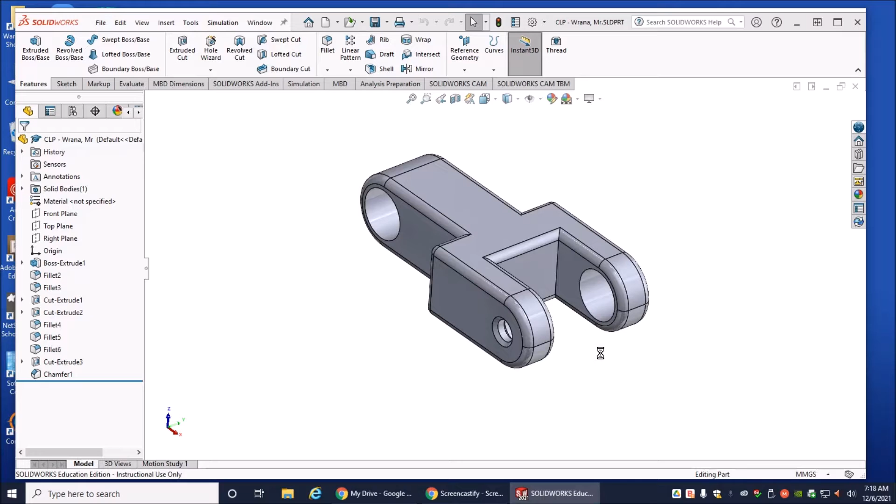First thing we need to do is make sure that we have our part open. I've noticed some people that were working have had issues with linking their drawing to their part because the part wasn't open, so the first thing you need to do is open the part. Next, we're going to open our drawing as associated, and it's doing its linking. And there is our drawing. At this point, you should have made any corrections from last week's assignment and gotten everything taken care of before you start this video. Okay, let's jump into the first part.

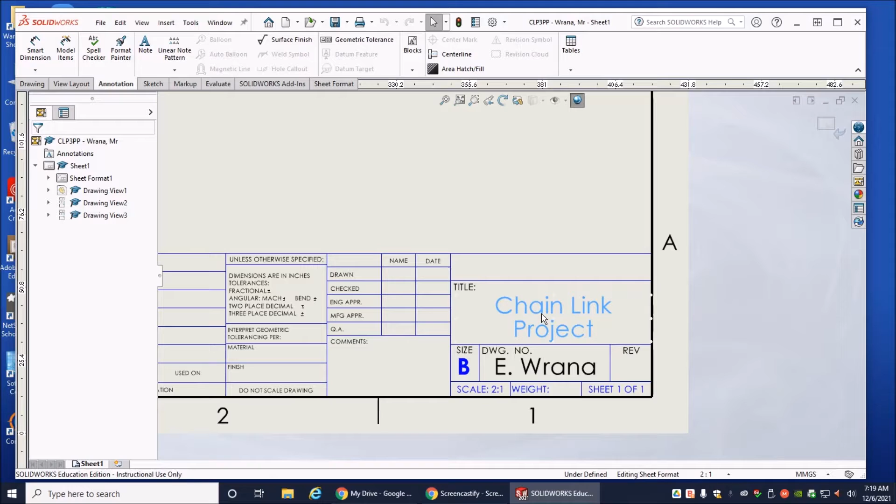Okay, sheet number 1 - down here you'll notice we have a tab that says sheet number 1. That happens to be our 3-point projection. We are going to make a change in this sheet, changing the name to 3-point projection. To do that, come up here to sheet 1, right click, edit sheet format, zoom in, double click into here, and change it to 3-point projection. Close the sheet, click out, and then close the sheet. And that is finished.

Okay, next part, we're going to add a new sheet, and what we're going to be doing in this sheet is what we're going to call an expanded view. So we're going to go down here in the lower left-hand corner where it says add sheet, and go ahead and add the sheet. Unfortunately, it does not carry anything over because there's no metadata, so we have to change this every single time. We're going to edit sheet - the box is there, you just have to click into it. We're going to call this expanded view. Click out, and obviously we're going to change this. What we found out is first and last name doesn't really work, so use first initial, last name - make sure it's capitalized first initial, period, space, capital last name. Once we do that, we're going to close the sheet.

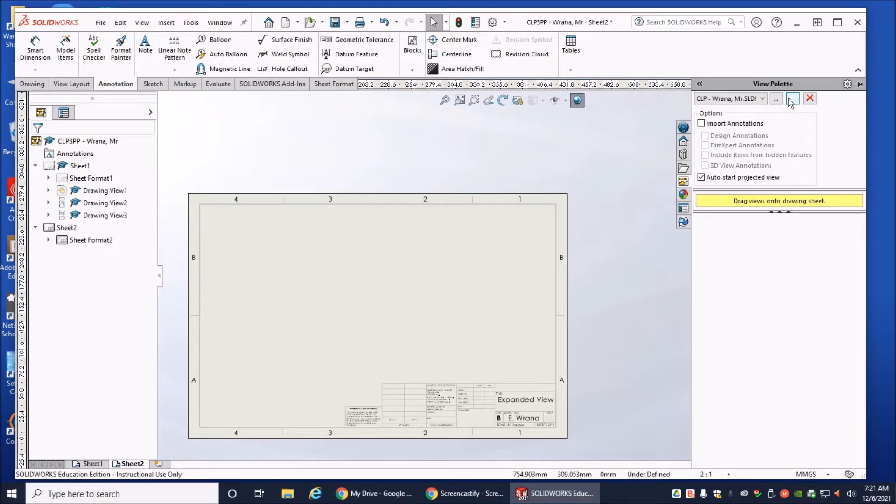We'll zoom out just a little bit. Now, expanded view, I'm going to open up and refresh, and there is my views. Now everything we're going to need is going to be in this orientation, so if everything on yours is vertical, you're going to start off with this view. Don't look at the front part, look for this view here. It's a little different from 3-point projection - this is going to be our standard view. So there's something in this orientation - again, if it's vertical, you have to rotate it when you drop it.

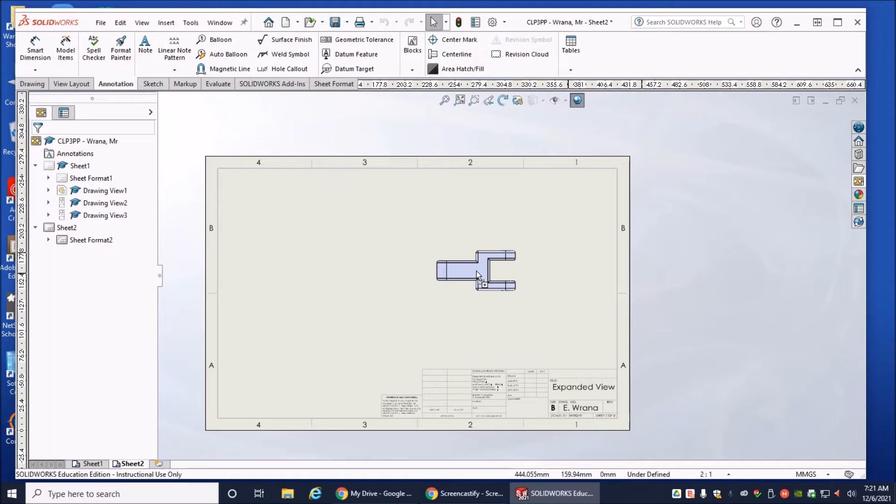So what I'm going to do is put this right in this column here, kind of in the middle - just drag about in the middle, eyeballing it. The two edges on the right-hand side for the groove is kind of in line with the line between 1 and 2, and drop it. If you need to rotate this thing to get it flat, use the rotate button up here before you do anything else. Yes, it's trying to drag a view up here, but hit the rotate button - a little window will appear, and rotate it 90 degrees, close the little window and then continue.

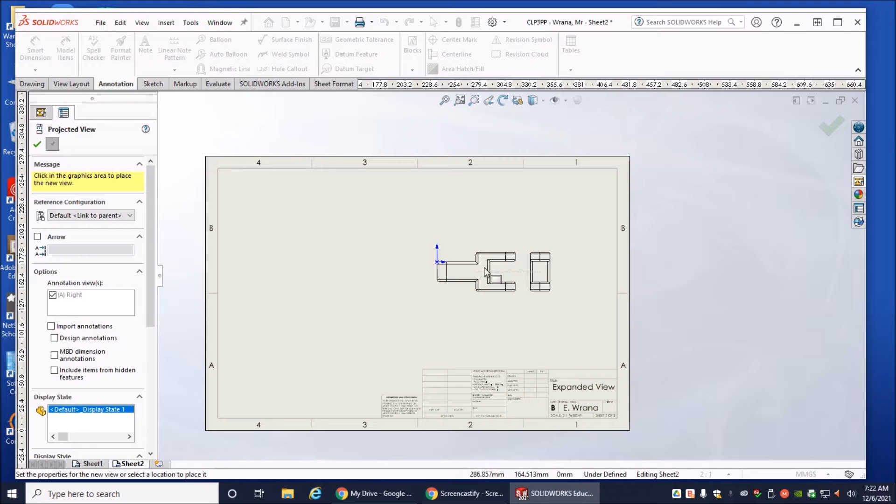Expanded view, I want to put one. Now, as you can see, this thing is trying to project all the different images everywhere - well, this is what we need. So I'm going to drop the top one up here, drop the bottom one down here, this side over here. This is kind of like taking a box, cutting it and opening it and laying it flat so you can see all the different sides of a box in one view. So it's kind of going to have a sideways T formation.

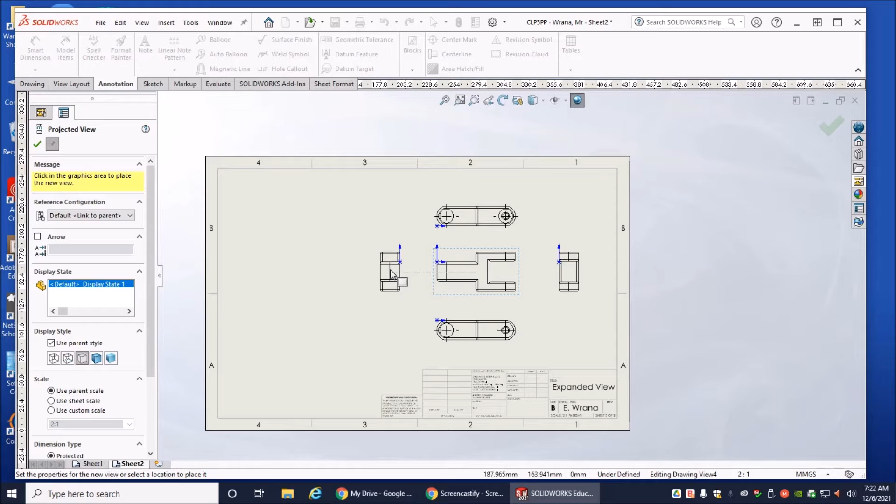Now the one over here is going to be different - this one is not what we need, we need the reflection of this. So I'm going to close out my projected view, come back over here - I need the opposite. Drag and drop, it is in line, drop it. And that is the expanded view. Close that - that is all there is to it.

Now, if we don't want the origins to show up, we can go to View, Hide Show, and go ahead and get rid of the origins. And that is it for expanded view.

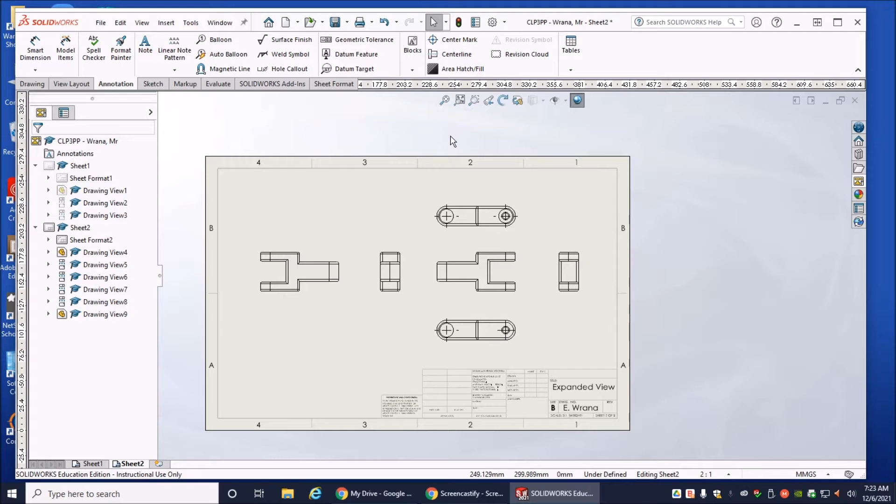All right, now the next drawing we are going to do is called a section drawing. We're going to take one of these views and put a slice line right through here to see what's on the inside.

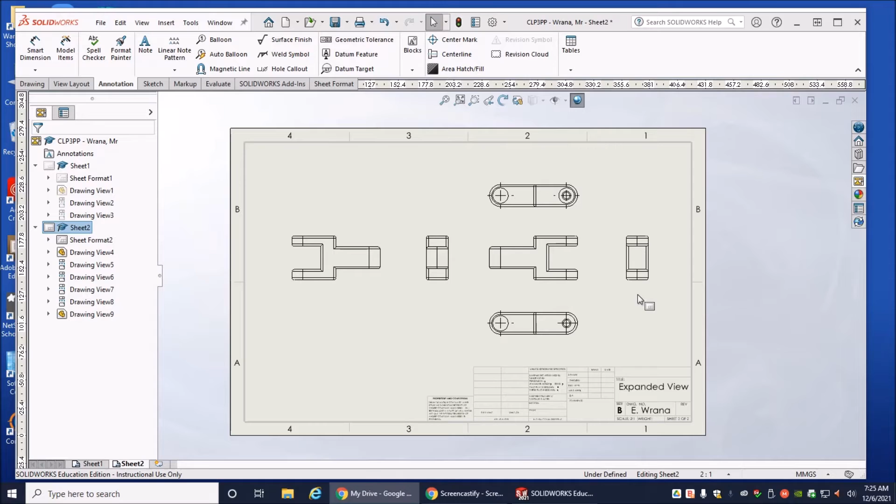So what I need to do is start a third sheet. This is going to be sheet number 3, even though it's identified as sheet number 4, so I'm going to rename this. I had a slight technical error the last time I was recording. Don't do that part, it should come up as sheet 3. So I need to go ahead and edit my sheet and edit sheet format.

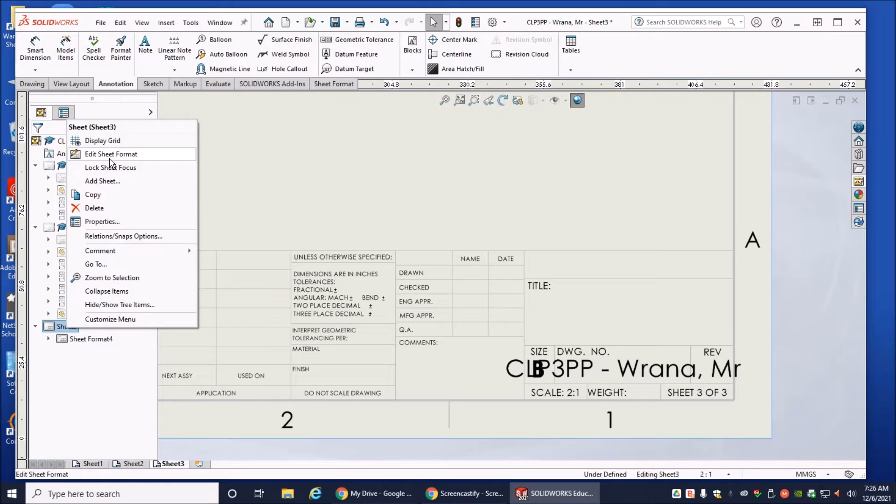And I'm going to change that to section view and change the name, then close the sheet.

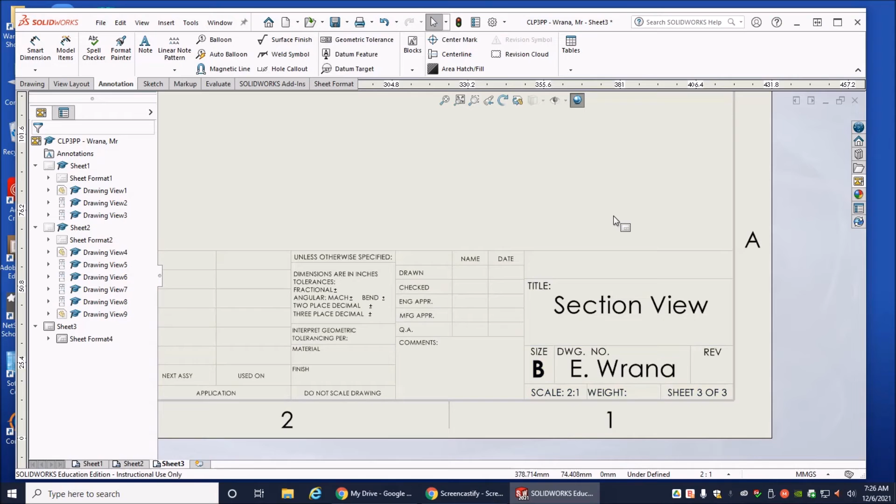Next thing I'm going to do is make an adjustment, because when I actually do this you may have to click the refresh button, so I'll go ahead and do that. We're going to have these objects be really, really small, and we want this to be nice and big. So what we are going to do is change the actual viewing aspect ratio, or the scale, which is right down here.

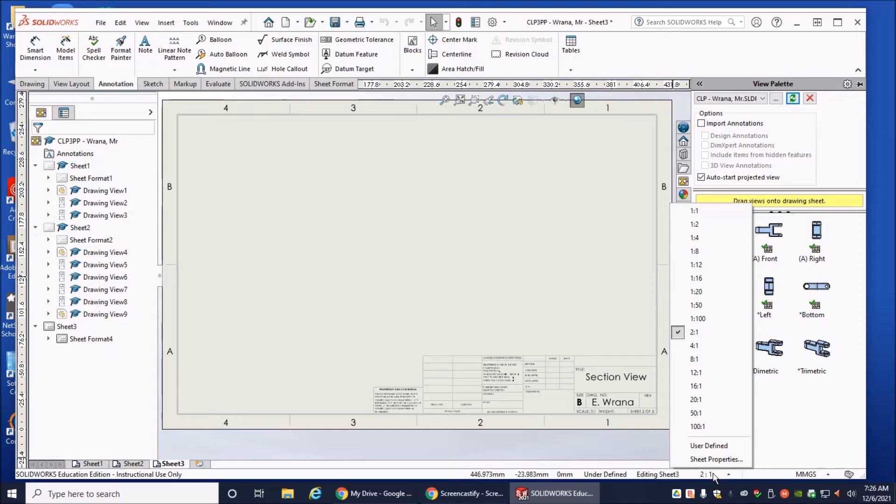So we're going to click. We have a whole list of different options that we can choose. We're going to go to user defined, click user defined, and type in 5:1. That's 5 to 1, which means 1 millimeter on the actual object is going to be equal to 5 millimeters on the paper, and vice versa, so 5 millimeters on the paper will equal 1 millimeter on the object. We're making this thing really big, and we're only going to have 2 views on here.

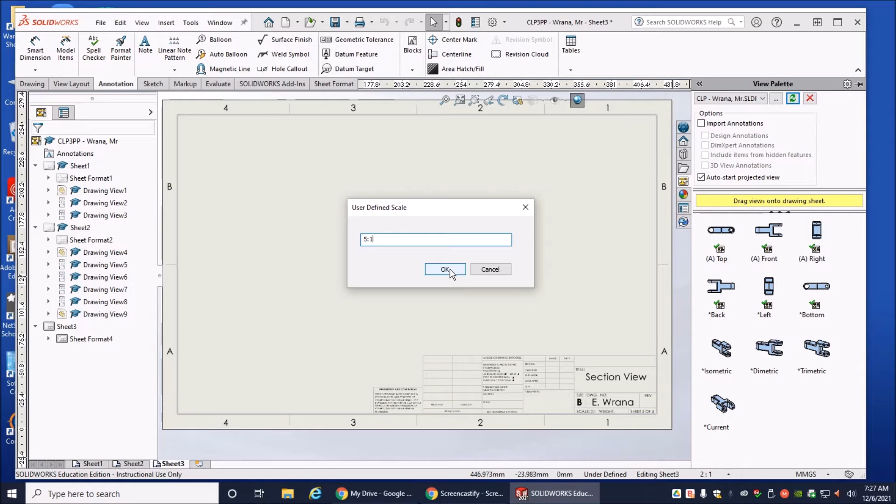Okay, going back to this, and yep, sometimes it does that. Now, the view that I want first has to be vertical, and it has to be the short end. What I'm looking for is the view that's going to match up to this part right here, but I want it from this angle, and it needs to be vertical. If yours is horizontal, you'll have to use the rotate button once you drop it.

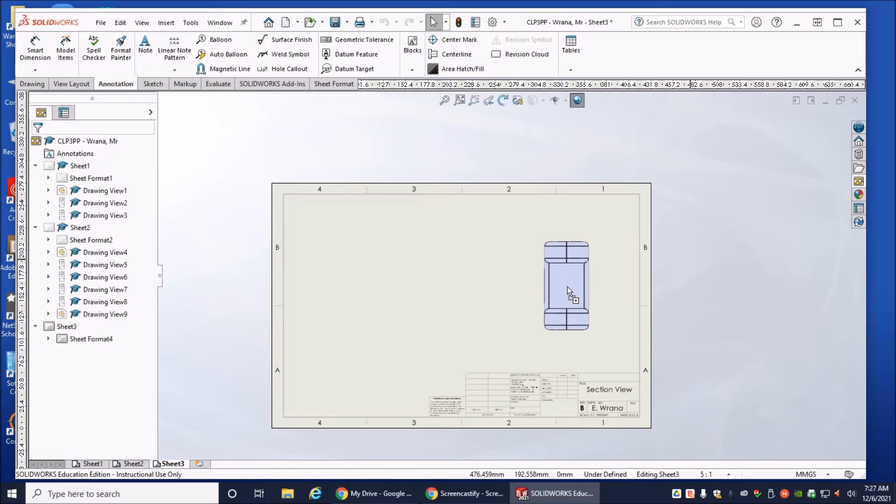So I'm going to go ahead and grab this. As you can see, it's much larger. I'm going to drop it right here, right in the middle vertically, and lined up with this, kind of eyeballed it. Once that's done, I'm going to go ahead and click the green check mark.

Now I need to find the button that says section. So, okay, well where is that, sir? I'm going to go to View Layout, and you will see a button here called Section View. What I'm going to do is click this button.

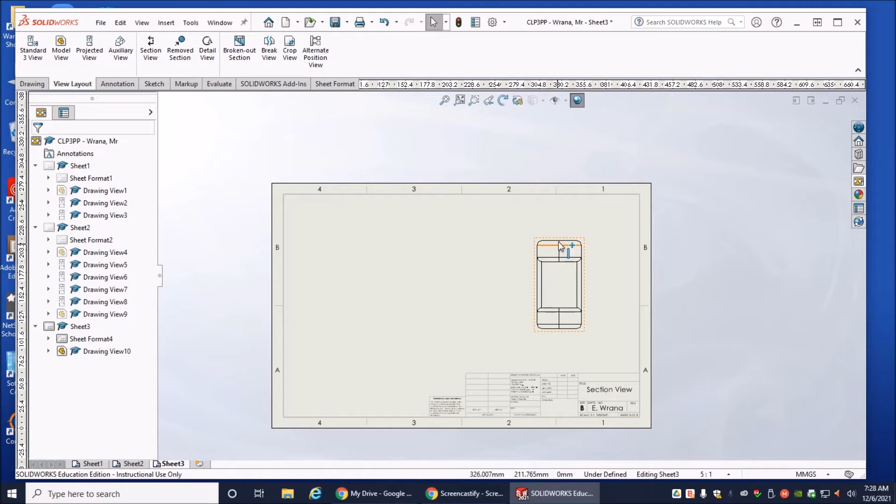It's going to give me this really weird looking line. I need to line it up with the center, which is right here. Since I've got this nice little line, I don't have to put a center line in here, but you can see the points right there help me line everything up. I'm going to click this, and like I said, it's got a really weird line. I'm going to go ahead and lay it right across that line right there, then click the check, and when I do, it gives me a section.

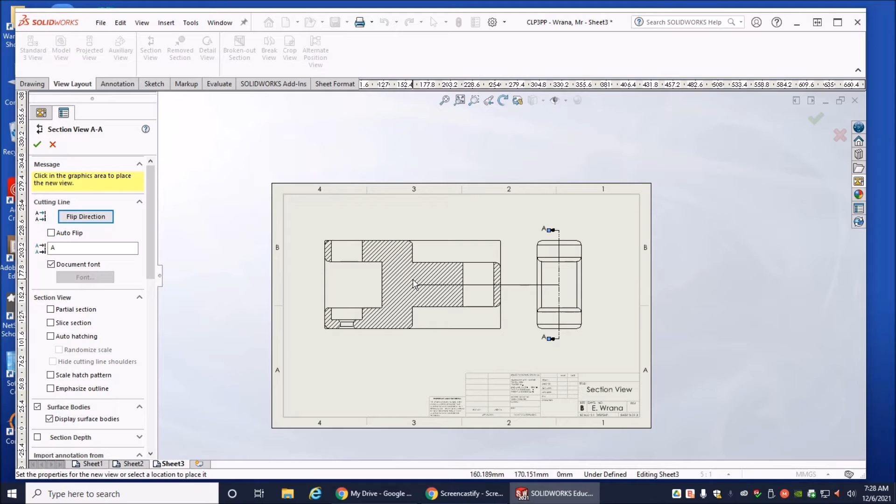And that is the section right there. I'm going to drop it right here, and close this out.

Now let me explain how this works. This right here is called a section. All the slash lines right here are actual solid material, and right here is a void. So there's no material here at this particular view.

Now we do need to do a couple of adjustments. I need to go ahead and add the view right here, and for me that was the right view. You can use the left as well, they're the same, sort of.

We'll go ahead and go to annotation, note, and I'll drop a note right here: right view. Highlight everything, set it to 24, and underline. Click out, we're not quite there yet, so I'm going to click this little check mark here.

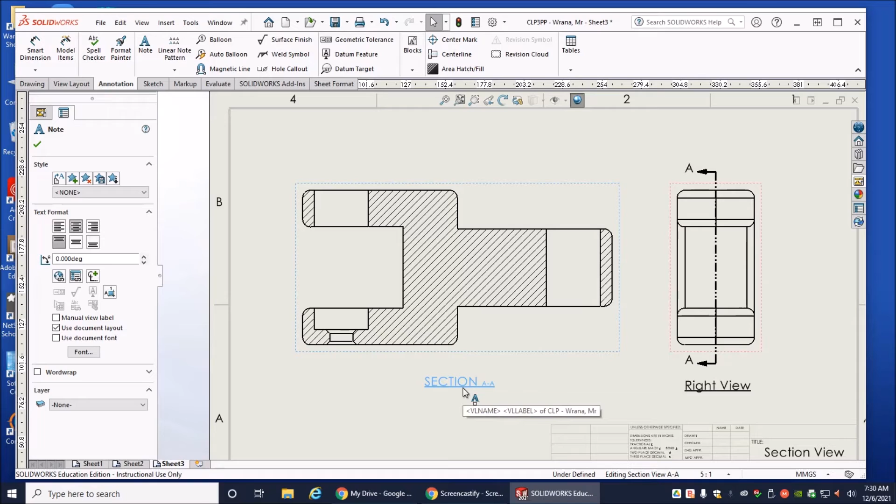Okay, now we're not quite where we need to be, and we're not even, so we've got to change this one over here. We're just going to underline it, so we'll double click, open that up, and then underline. Click out, and make sure that the section and the right labels are kind of even. There, and that is the section view.

Okay, sheet number 4. This is going to be a really easy one. You're going to spend more time editing the actual title than actually creating the view itself. These next 3 are going to go really fast.

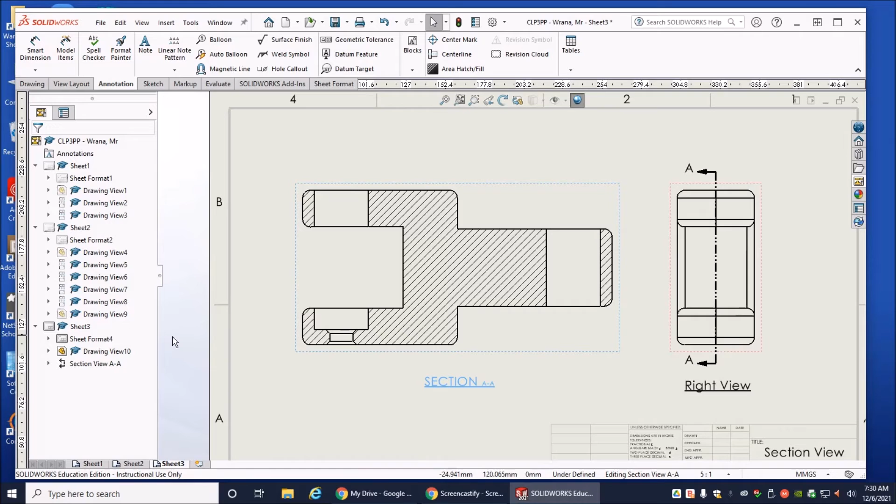I'm going to create my next sheet, which is sheet number 4. Got to do the same thing again. Edit the sheet. This is going to be our isometric view, which is based for both axes on a 45-degree angle. I will explain that in a few moments. Isometric view. And change the name. Click out.

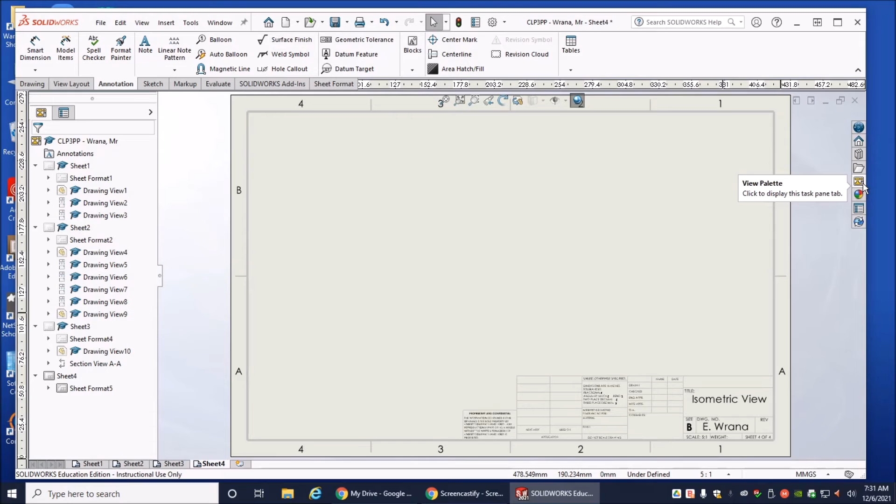Okay, I'm going to keep my scale ratio at 5:1. If it's not, go ahead and go back to user define and select 5:1. Open up our palette, refresh. This one's going to be really easy. Why? Because there it is right there. This is the isometric view. So at 5:1, I'm just going to click and drag this over here, right smack dab in the middle.

Okay, now what is isometric view? It is a technical drawing showing the 3D view where the line right here and the line right here, even though if we had one, are at about a 45-degree angle. Actually, it looks like it's 30. Should be a 30-degree angle. And that is it for that view. Nope, there's nothing else to it. And now we're ready for our next drawing.

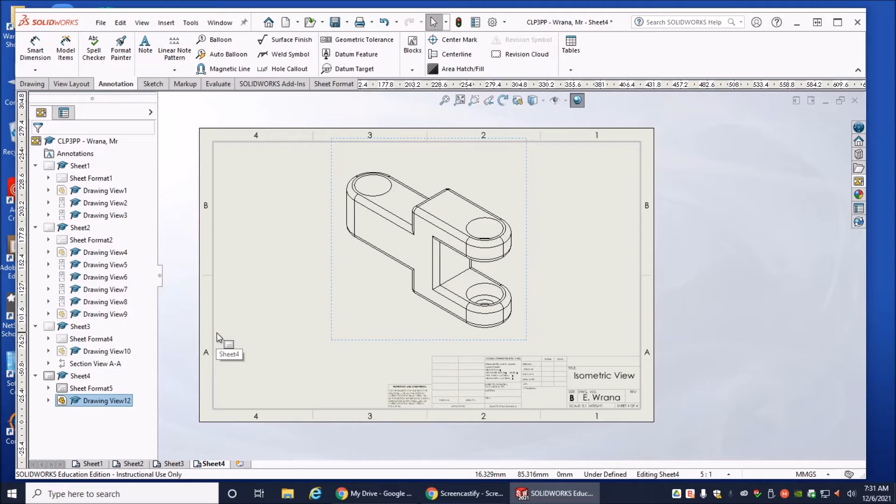Okay, we're going to do sheet number 5. Yep, same thing, you guessed it. I'll go ahead and edit sheet format. Double click in here. We're going to change this one to what's called dimetric view. Click out. Close the sheet.

Oop, my bad, shouldn't have closed the sheet there. I forgot the name. Yeah, this sometimes happens, you start to go on autopilot. So don't go on autopilot like your instructor. Okay, go ahead and open up the palette, refresh. We're still at 5:1, if not, go ahead and change it.

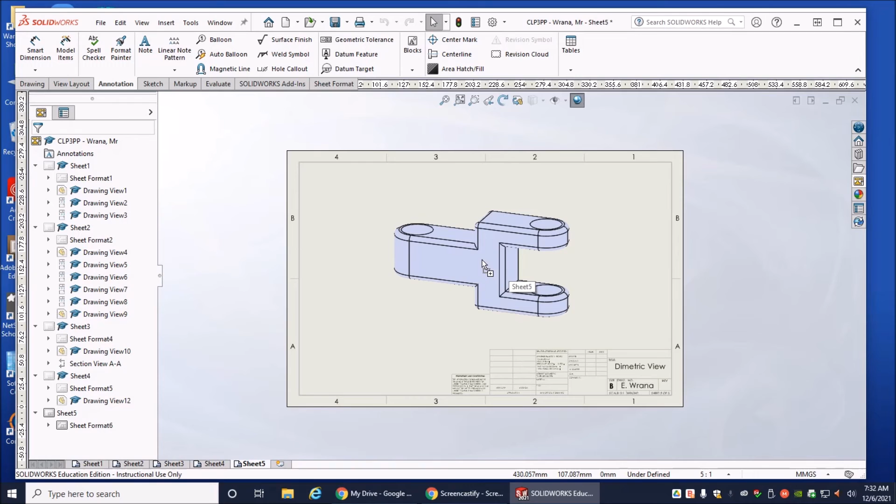And looky there, there's dimetric view. And you can see the difference between these 3 different views. So I'm going to drop that, again, right in the middle of everything. Close that. And guess what? This is now done.

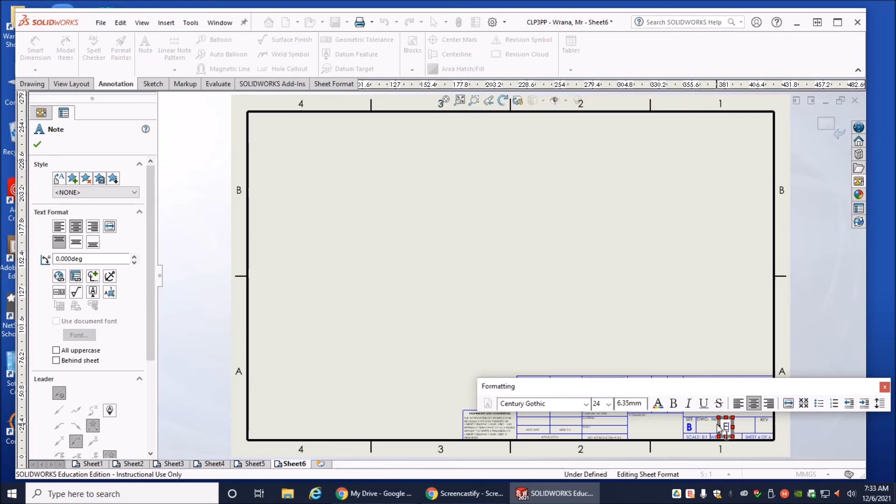Okay, the last view that we are going to create is going to be the trimetric. So we're going to open up sheet number 6. Yep, you guessed it, we're going to have to go in here and edit sheet format. This is where using that metadata would really come in handy. So this is going to be the trimetric view. Out, don't forget the name. Out, close the sheet, open your palette.

Refresh. And there's the trimetric. Drag and drop. And that is now done.

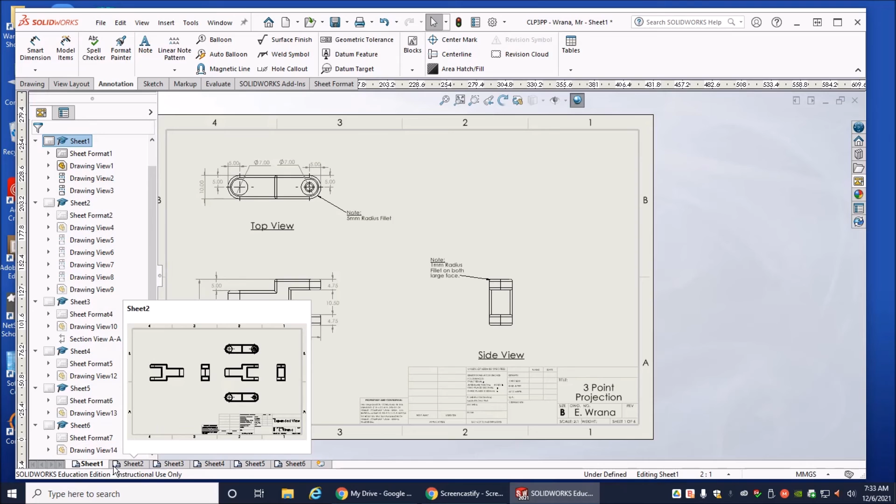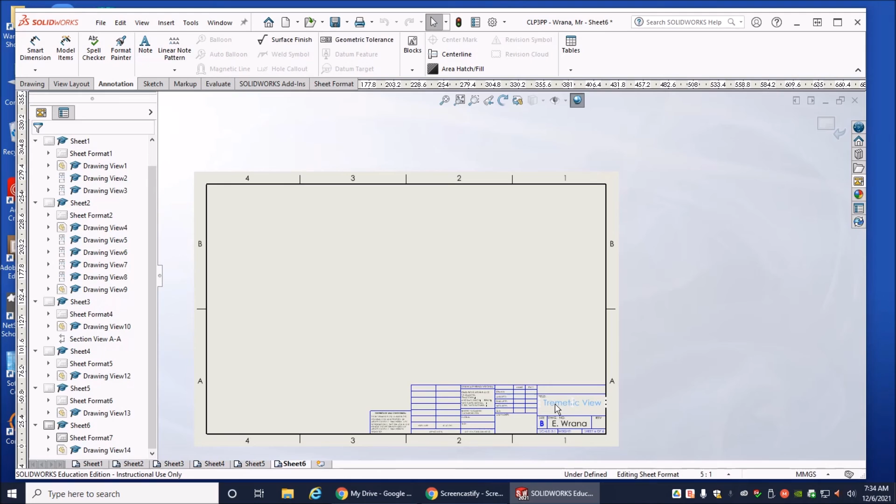That is the 6 sheets that we need. So we have 3-point projection, we have our exploded view, we have our section view, we have our isometric, dimetric, and trimetric views. Okay, the next thing, I just realized that I misspelled trimetric. So if that happens, go back and change the spelling. It's one of the things that doesn't exactly have a spell check.

All right, the next thing we need to do is print. Okay, time to print all 6 sheets at the same time. So what we're going to do is we're going to go back up here to File. Actually, we're going to come over here and quickly click Save. Come over here to File.

We're going to drop down to page setup. We are going to verify that everything is the way we had it to begin with, which is scale to fit an 11 by 17. So we are good. I'm going to click OK.

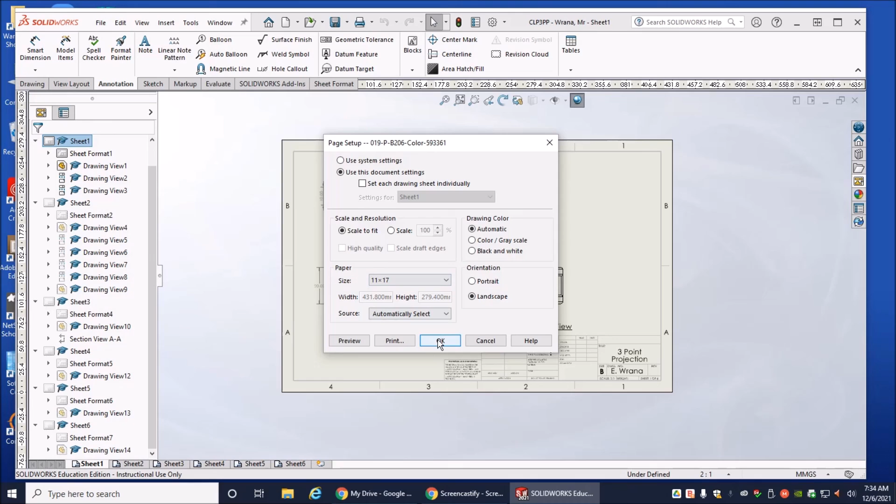File, I'm going to go down here to print. Make sure we're at 593361, and we're going to click all sheets. Now, when you click OK, you're going to have to walk over to the printer and retrieve your prints. Don't leave them on the printer, because once you do that, you've got a couple other things you're going to have to do. And I'm going to click OK.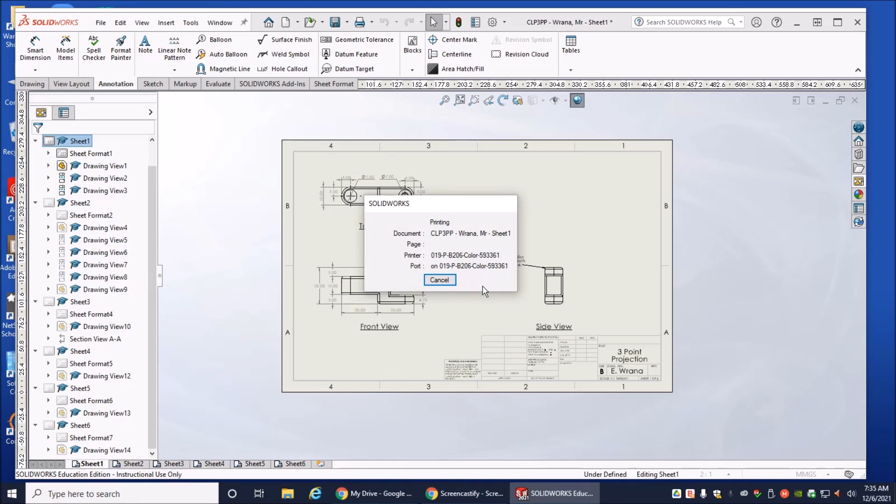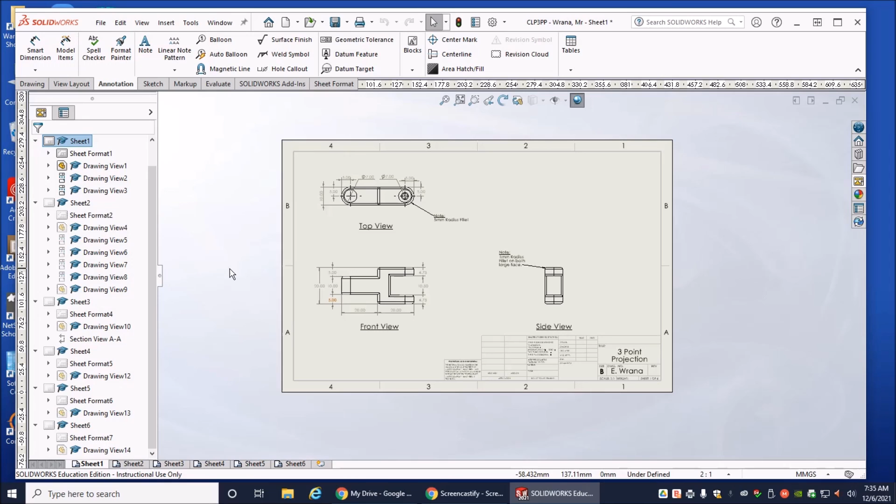And that is sending the data over to the printer, which is by the pillar, which is against the wall by the pillar next to the 3D printers. So go ahead and retrieve those. And then what you're going to have to do is you're going to have to go to Mr. Wrana and get, that would be me, and get your custom-made title page, and then go ahead and comb bind your documents, and you'll have to have them in this order.